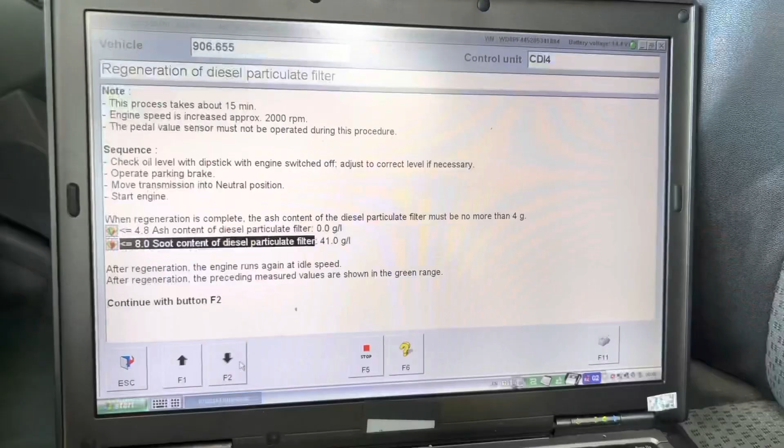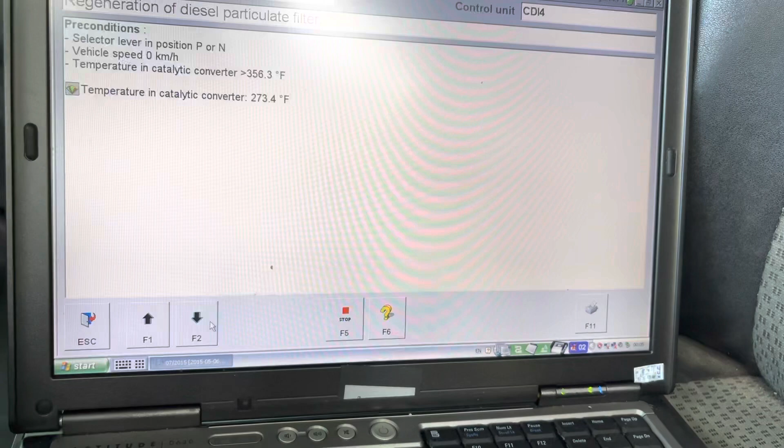So we're going to be regenerating the diesel particulate filter. Looks like the soot content is 41 grams, so that's a lot. Let's go ahead and see if we could regenerate it.

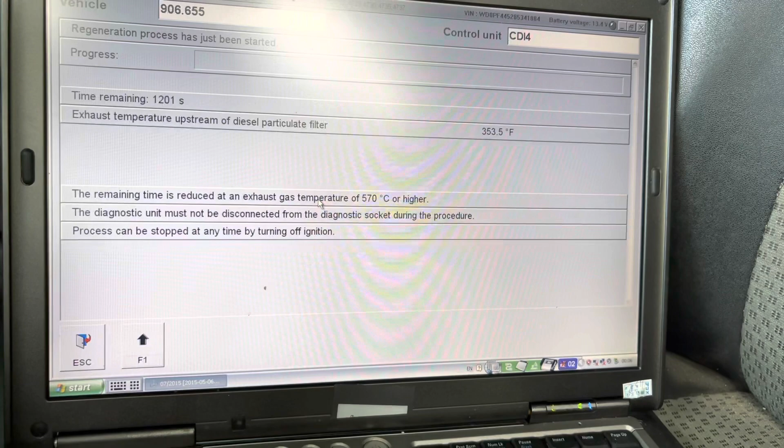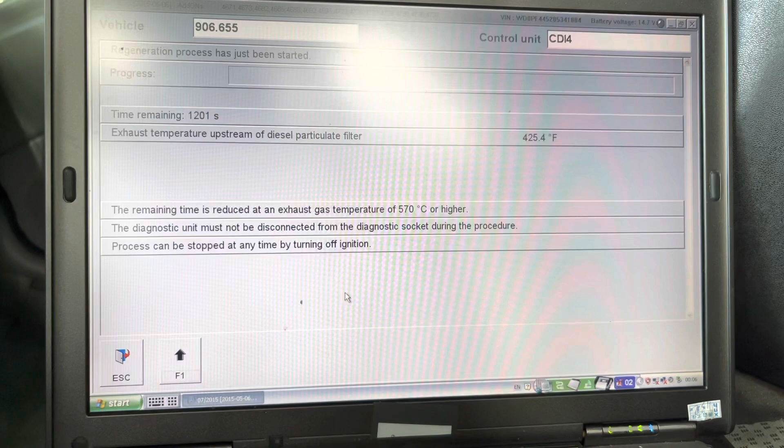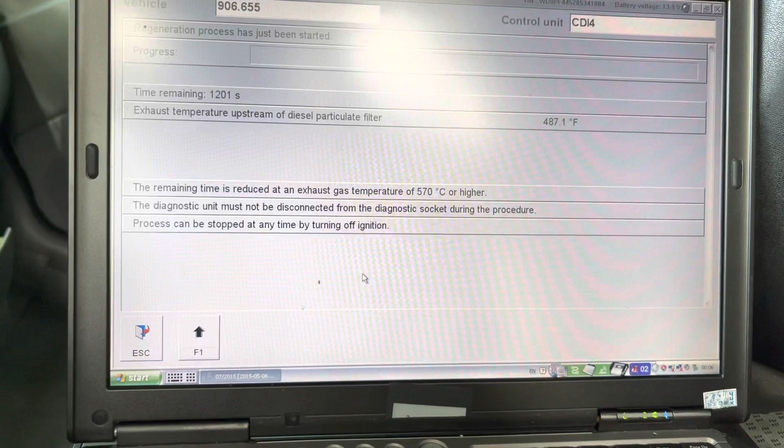If this worked, this should take about 15 minutes to do from start to finish. But the problem is, they never work. They will constantly shut off and kick you out, and you have to start over. So right now what's going on is it's trying to warm up the vehicle to the appropriate temperature so the regeneration process will begin.

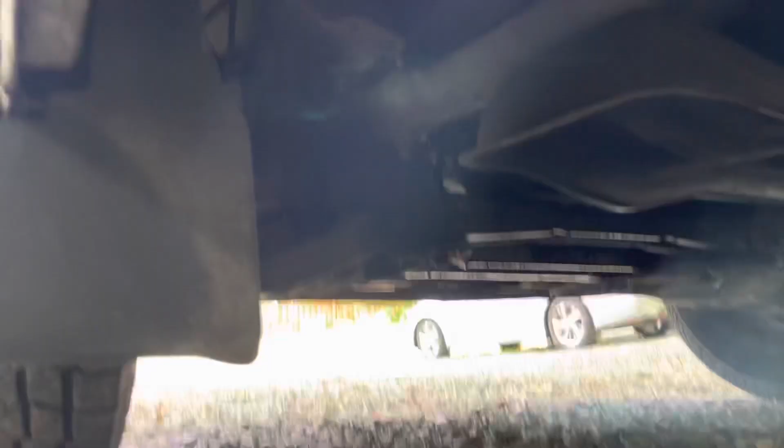I can definitely hear hissing at the bottom. Oh yeah, I can not only hear it, look at that. That's where the leak is.

It's pretty bad. So I am regenerating this 2007 Sprinter. As you can see, lots of nasty smoke is coming out. It stinks pretty bad. Now we're going to crawl underneath.

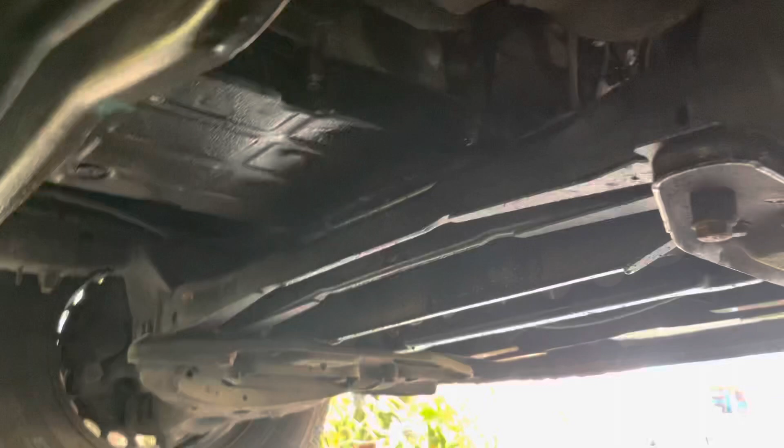I'm not going to speak. God. Oh man, that stuff is nasty. Just nasty.

I mean, it's obvious it's coming from the bottom. Earlier I went down there, I could not see this type of smoke. It was somehow a little bit more clear. I could certainly smell it, and you can see it's all right there where the intake manifold is.

Now, I believe there's a possibility that the flex pipe, right there at the back of the engine where the turbo is and the EGR system, those are common to break and leak right there. So there's a good chance that that is actually what's broken, but it's very hard to get to it in order to replace it with everything in the way there. So unfortunately, a little pipe, big job.

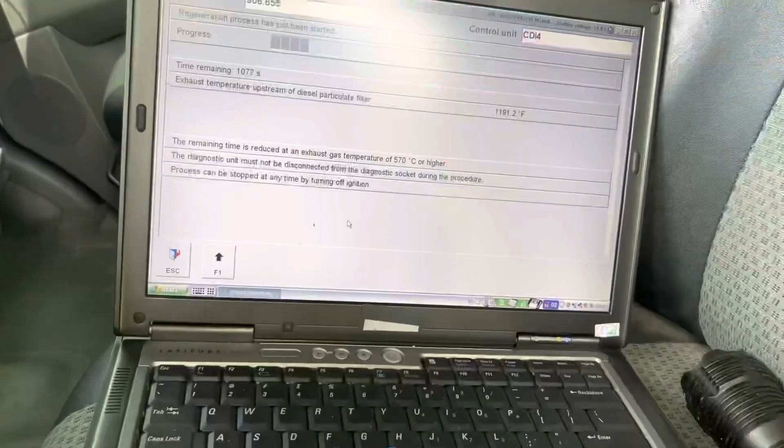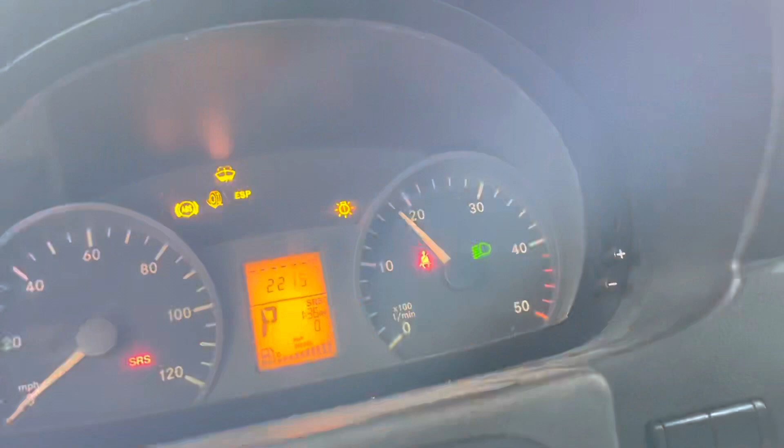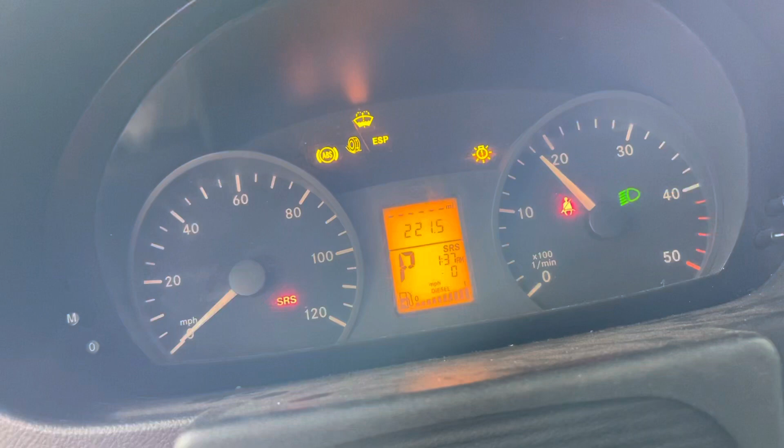Well, anyways, here's a little update of the regeneration process. It is underway. This bar needs to fill up all the way to the back for the job to be complete. At this point, the exhaust temperature upstream of the diesel particulate filter is 1191 degrees. It is steadily a little bit slightly below 2000 RPMs, about 1700 or 1800 RPMs. Regeneration is in progress, so that is definitely a good thing.

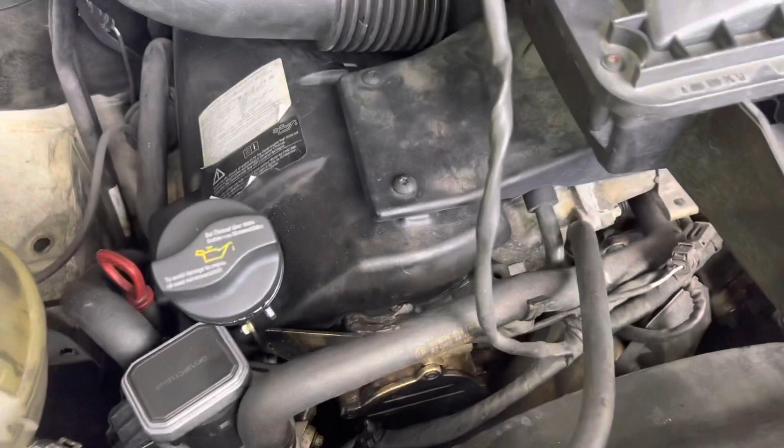I'm just going to observe one more time underneath the hood as the regeneration is in progress. You can definitely see smoke is rising from here. It's kind of hard to see in the camera, but you can see it right there. It's so bad, it's burning my eyes.

With the hood closed, most of it has no place to go but down. So with it up, that's where that goes. Well, that's not good, looks like our test just failed.

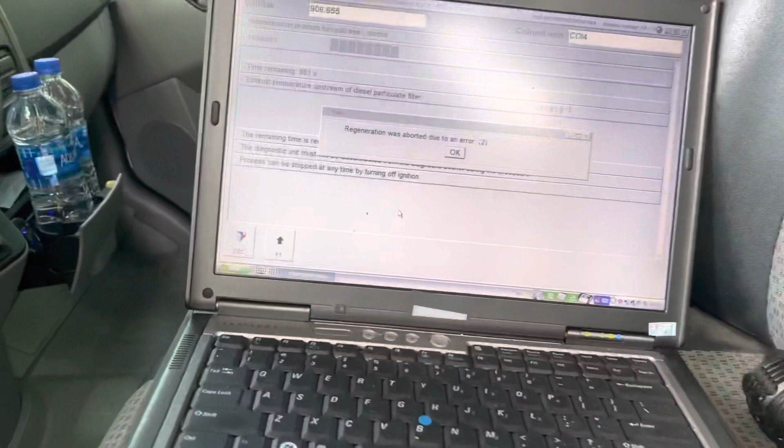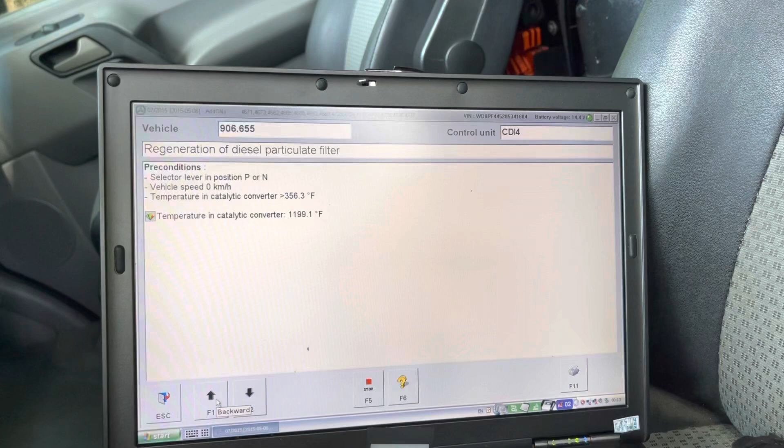An error occurred. This is always happening. So in that case, you just have to start things over. So we need to continue. Error occurred again.

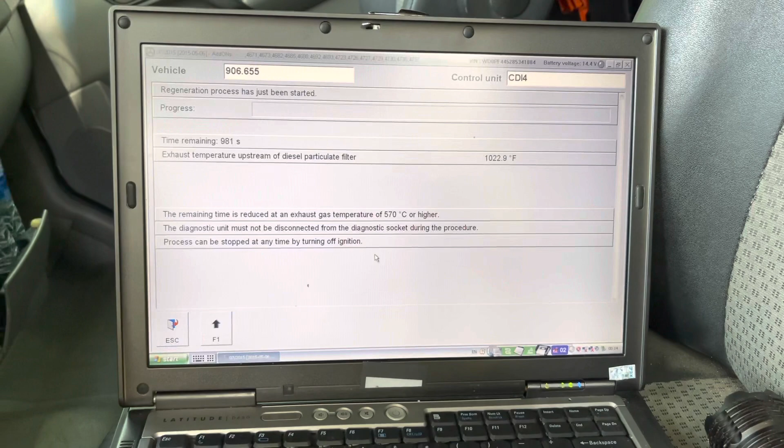It's interesting, the error occurred this time, but the engine did not slow down. Hopefully we could burn it out. But the good thing is, even if it fails, you just have to keep starting it over and over and over and over. And if you do that for about an hour, it's going to clean it up all the same way.

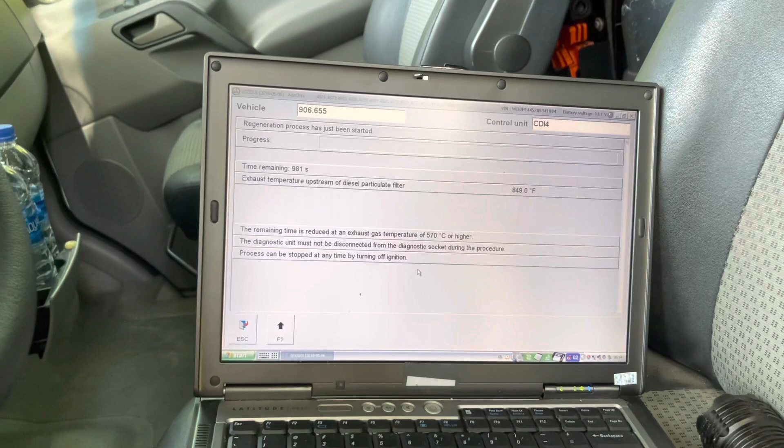It's just, the thing about it is it just makes you work overtime, because sometimes it just kicks off sooner than later. In that case, I have to just continue doing it. But I'm not going to record every little detail, I'll just let you guys know how long it takes.

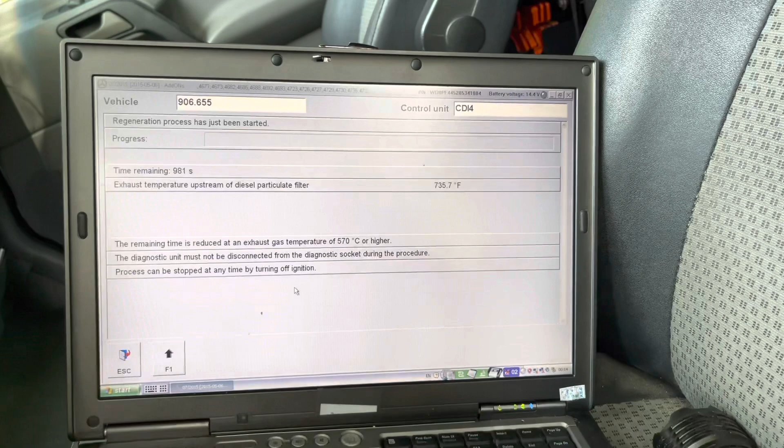So the time right now is 3:18, and that's what we're going to look at, how long it's going to take. But if it tries to regenerate all the way, I will definitely let it, even if it fails many times, just to make sure it's clean.

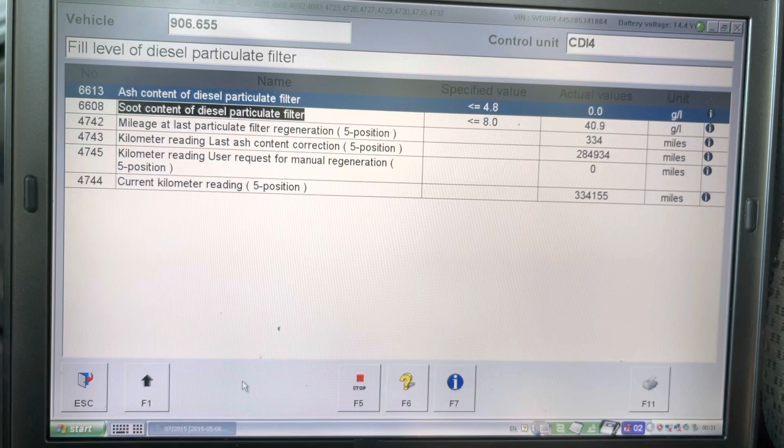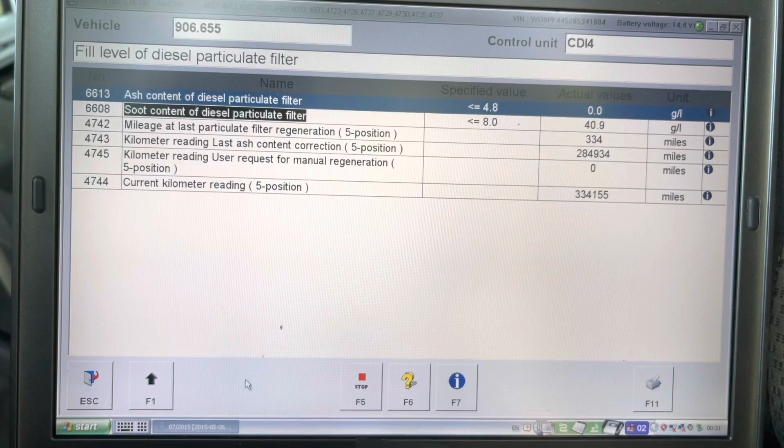So here we have ash content of the diesel particulate filter is 0.0, so that's actually quite low right there for the ash. But the soot content of the particulate filter is kind of high, it is 40.9. Yeah, that's definitely a problem, but it just keeps failing.

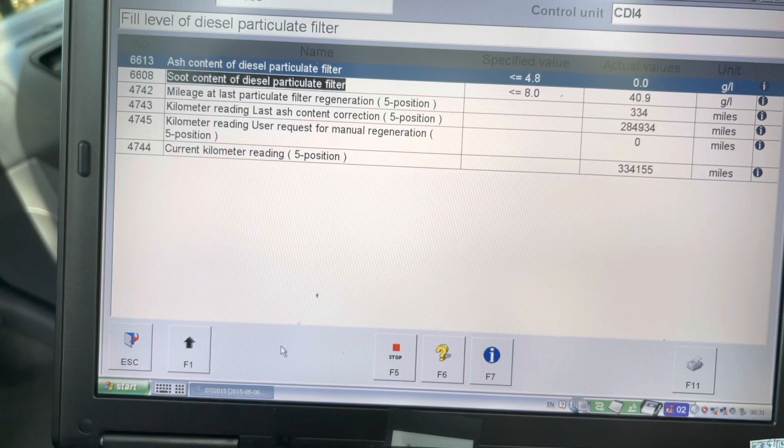It's not letting me try to regenerate it, and the reason it's failing is definitely due to it being in limp mode. When it's not in limp mode, things work a lot better, but in this type of situation, it just keeps failing.

It's 3:36 p.m. Just started the regeneration process over again. It just failed again. Just really being glitchy.

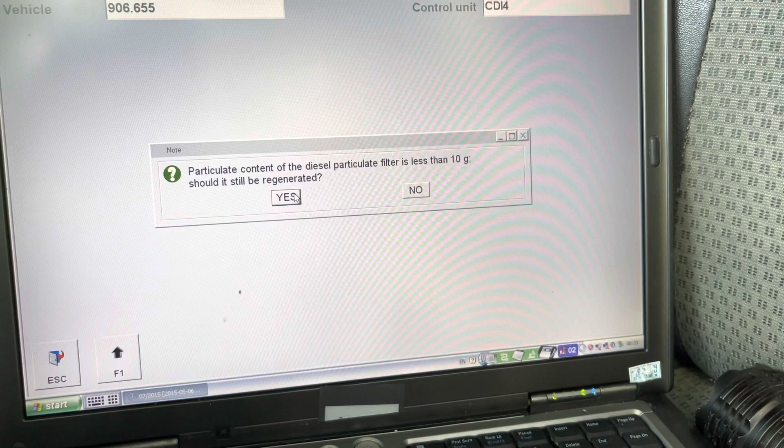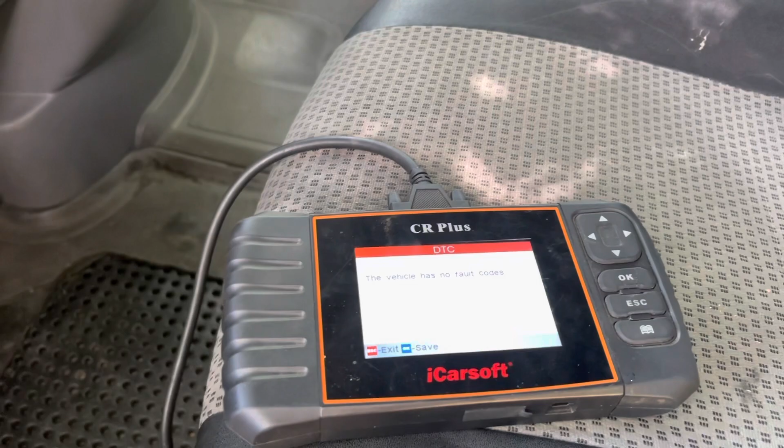So the regeneration process is over. I'm not going to say I've been satisfied, but it has taken more than an hour of my time failing and things of that nature. So here's what I want to do, guys.

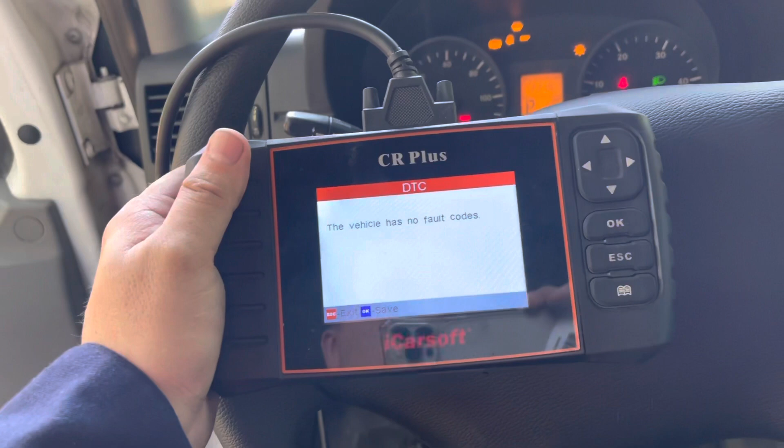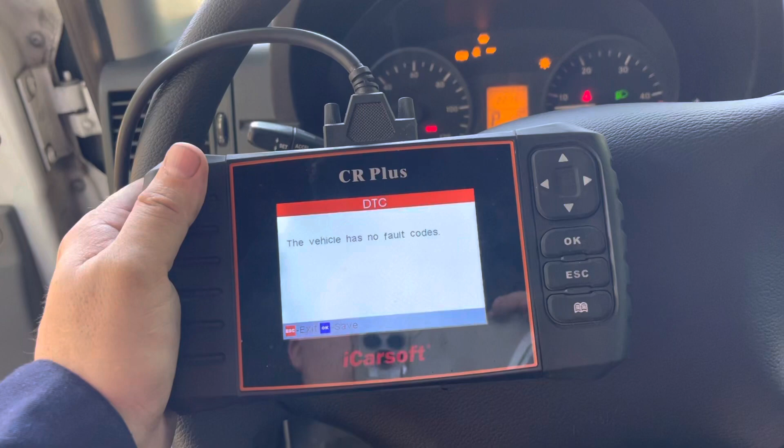I want to go ahead and take this vehicle on a test drive. I just scanned it, despite it operating all this time trying to regenerate, no codes have come back, so I'm going to try to take it on a test drive. I want to see if the swirl valve codes come back. If they don't, hey, that's going to be good. Also, if the P299 code comes back, because there is a major leak.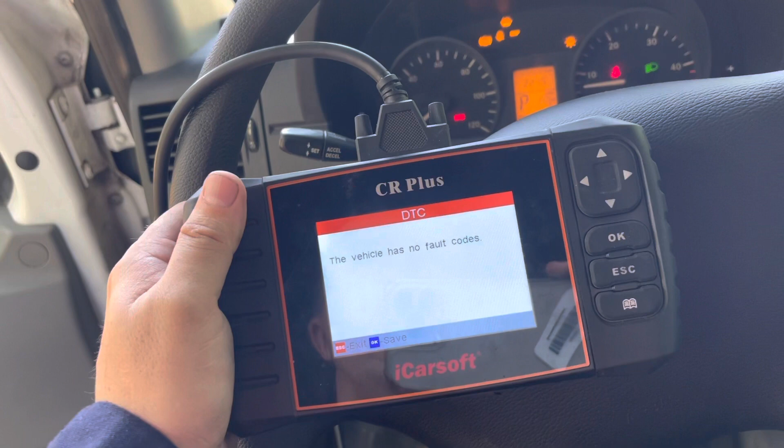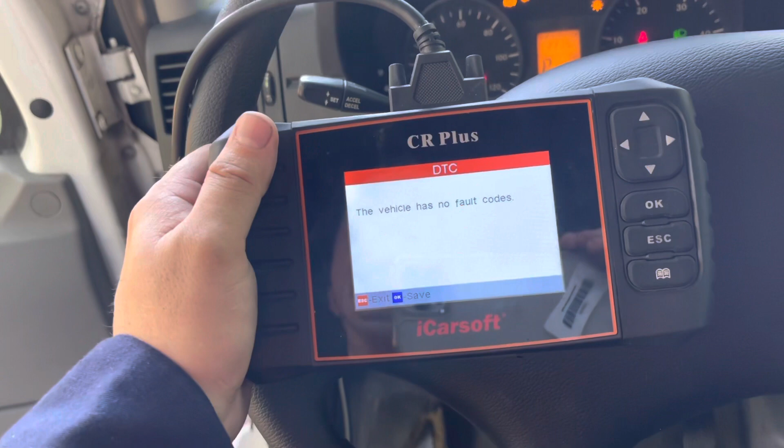I believe it's coming from the flex pipe underneath, but it's very hard for me to look at it because, man, I'm choking with those exhaust fumes. At the bottom, I could only stay so long without air. But I do believe it is definitely leaking. All right, here we go.

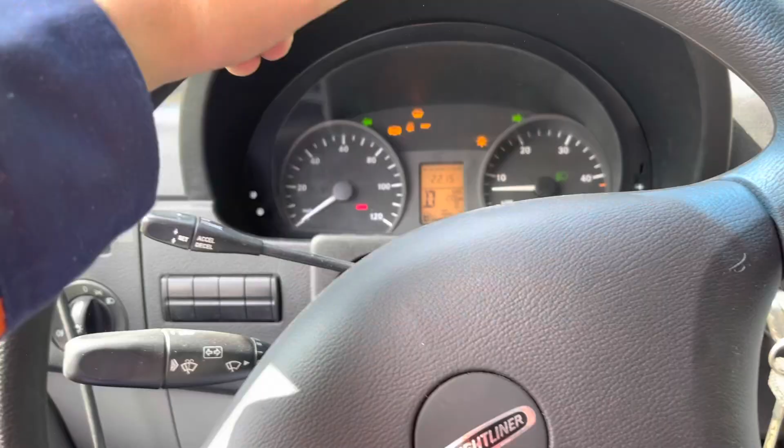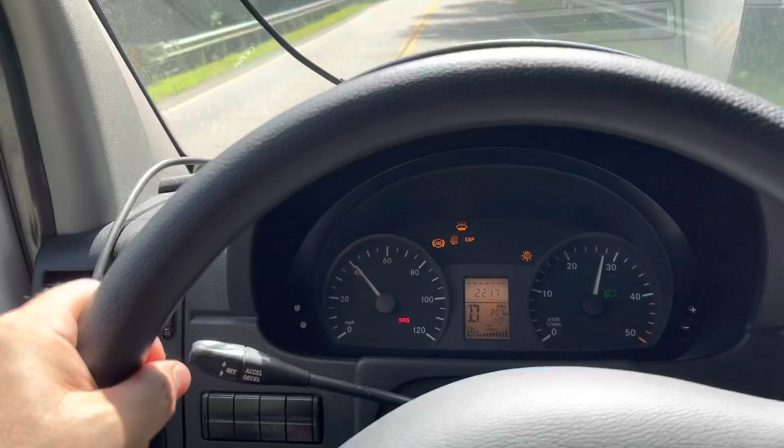And immediately limp mode gets triggered. I'm still going to take it on a further test drive, even though it's triggered. I want to see if the swirl valve code comes back.

If the intake runner is still stuck, because we had a code where it's stuck, let's see if that code is still present or not. Man, unfortunately it's very slow acceleration.

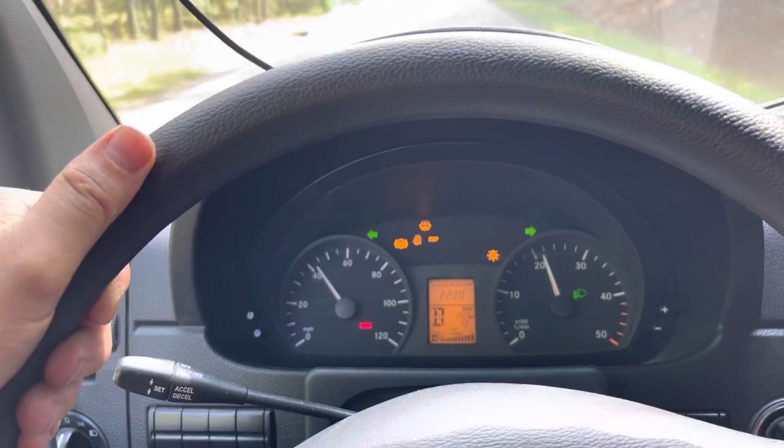I'm gonna go ahead and put my phone away, but before I do, I want to let you guys know that I'm basically having the gas pedal all the way down for this entire test, and still it's extremely slow. So guys, the van is acting real weak.

So let me just show you kind of like what I mean. We're gonna turn around, we're gonna go downhill. So this is me pressing gas all the way down, and we're going downhill. But I'm getting some jerkiness out of the van, like it's also lacking in fuel. That's definitely possible - this fuel filter probably has never been changed.

So right here there's a slight incline, and I kind of like to test things where it's safe, just slight. So watch what happens when I press the gas pedal all the way down.

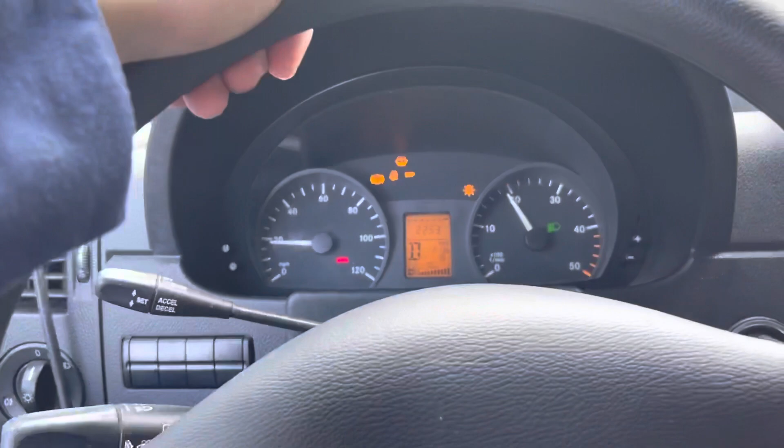Did not do it this time, but it was definitely jerking for me the other time around. I was not recording, so I'm gonna stop it again and just accelerate.

Right there's a little jerkiness there. You're not gonna really see it on the camera, but I feel the hesitation on my pedal. And right there, boom, boom, boom, boom, boom - it's just jerking. This van is just all over the place. It's just starving.

Right there, some jerkiness. Right here you can kind of see it reflects a little bit in the RPM gauge.

Yeah, this van needs a lot of work done. Definitely a lot of work. Just way too much wrong with it. At this point, it's really hard to say what's really causing what.

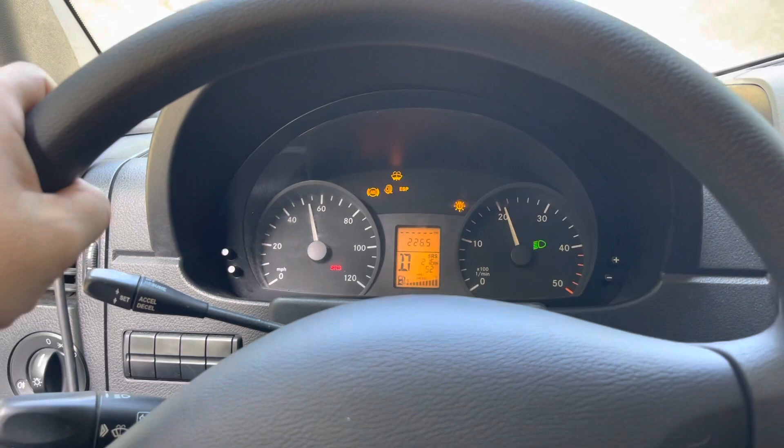I really don't like when this kind of stuff happens. I've done already what I was supposed to do in this van, but there's apparently more to do. In this type of situation, my hands are a little bit tied. The customer wants to do some of the work himself, so I cannot really do everything that I want to do, and I don't blame the customer - a lot of the stuff is going to be a lot of money and a lot of work, so if he can save some money by doing some of the work himself, then so be it.

But this engine, it needs to be pulled. A lot of stuff needs to be replaced, and definitely the oil cooler seal needs to be replaced.

Finally, we're going downhill - we got a chance to accelerate to 60 miles an hour. And it's gonna be losing some energy, as I thought, going up this hill, even though I'm applying the gas pedal all the way down.

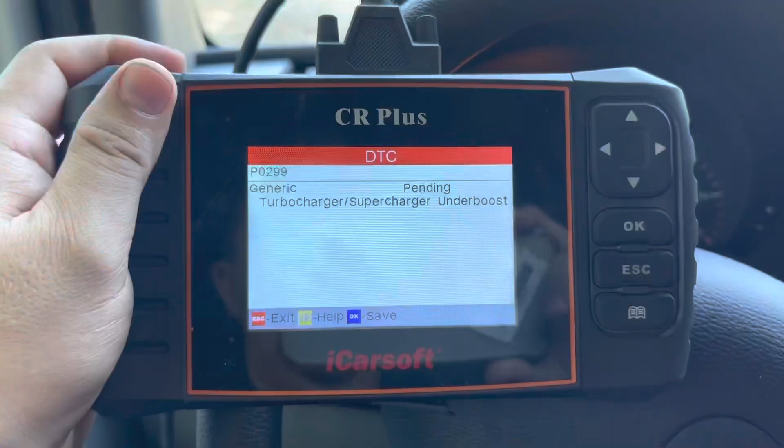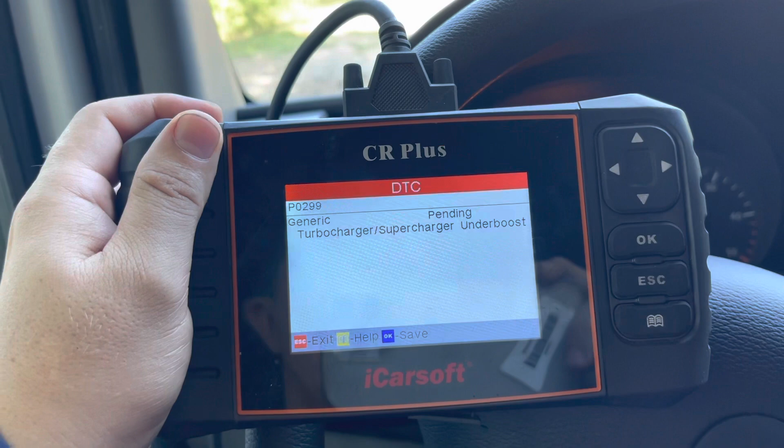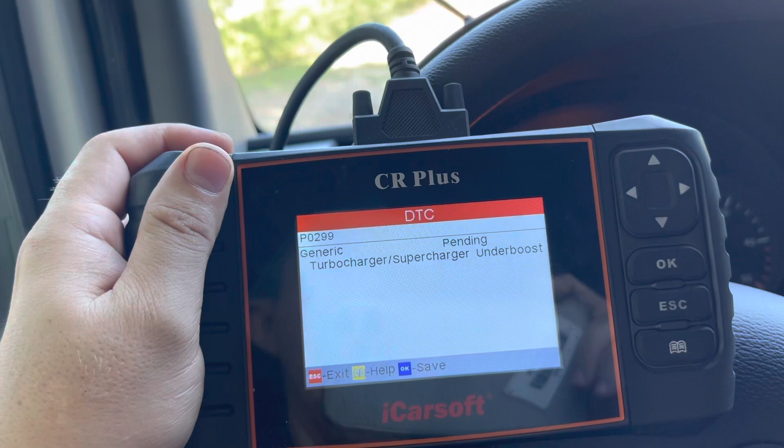Well, I do believe that we have some good news, because guess what - the intake runner being stuck is no longer an issue, at least it's not popping up right now. The only one that we're having is the turbocharger/supercharger underboost, which is a very common issue on any Sprinter model. It's just in this type of situation, it is not common where it's actually leaking, because it's not leaking at the actual airbox - it's leaking to the right side of the engine. That's mechanically speaking, if you're sitting behind the steering wheel, where the EGR system is.

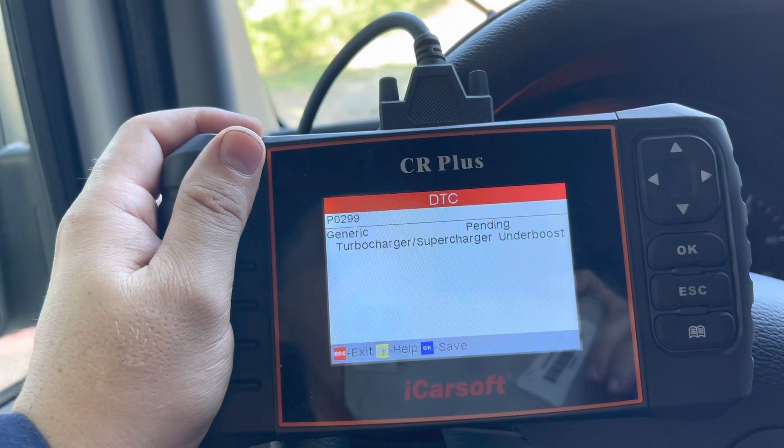And I'm gonna walk you to an engine from basically the same model year vehicle and show you what I'm talking about. One thing for sure, that oil leak from the oil cooler seals is pretty bad.

Look, this right there, all those drips that you're seeing, that's just from me pulling in. And you can see, look at that - the drips start all the way from here, from me pulling in. So that's a pretty big leak. By the time you get somewhere, you're gonna lose about a quart of oil.

So that hesitation that I'm feeling might be also low oil. And I checked the dipstick earlier and it was low oil. Also, when it's leaking oil from the oil cooler, there's other problems that could occur from that.